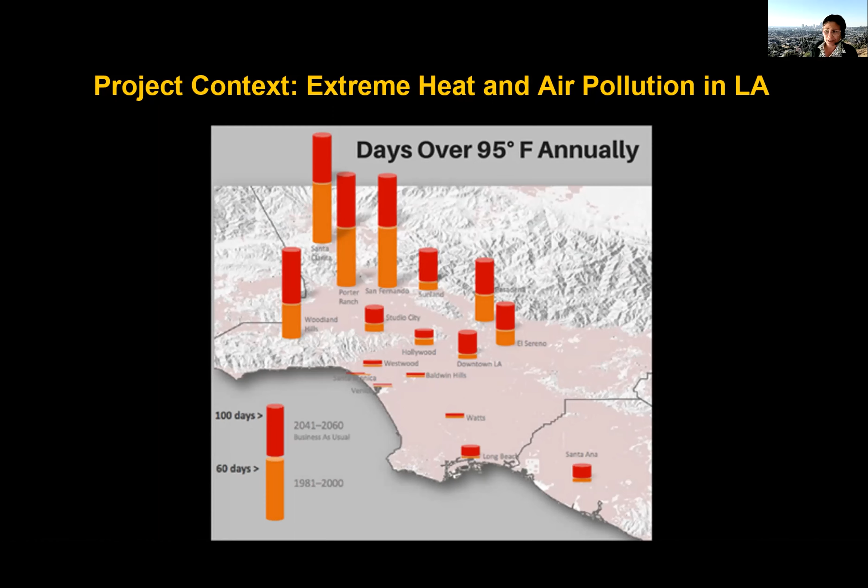Not every place in the basin is going to experience the level or the quantity. Everything's going to multiply, but some areas will still have less hot days than others. Some areas in the valley already have hot days, and they're just going to see more of that.

So we actually started this project out—one of the things I did was, I happened to be very fortunate, on September 15th of 2020 I took my laser thermometer out there and started measuring the temperature on the asphalt and the streets, on the sidewalks, on the grass, and under the shade of trees.

And I found extreme surface temperature differences. For instance, in Lincoln Park, a high of 140 degrees on the asphalt and a low temperature of 88 degrees under the shade of a single tree. That was really similar all over, with 30 to 40 degrees of difference between paved surfaces and shaded surfaces.

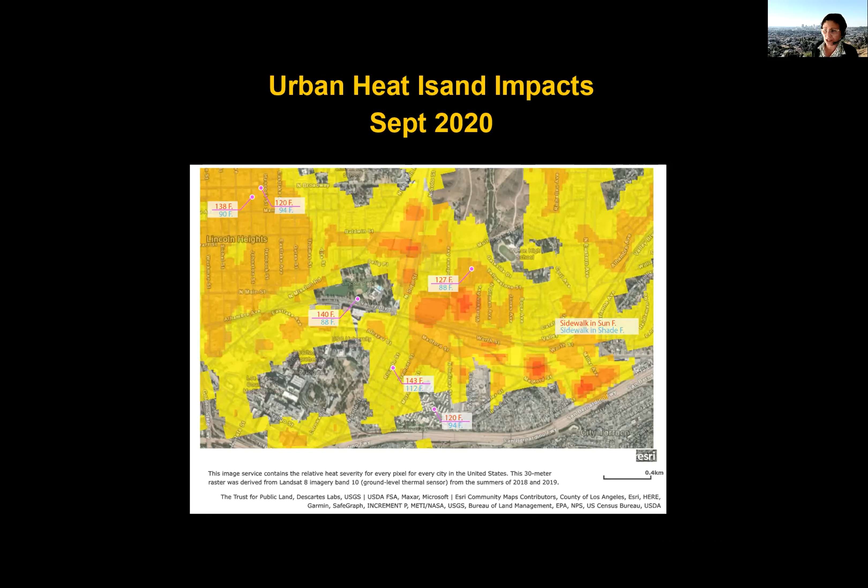So that was a good piece of information and has served us well throughout the study. One of the questions is, what kind of tree? What are the trees that are going to provide effective shading? How can we be more strategic?

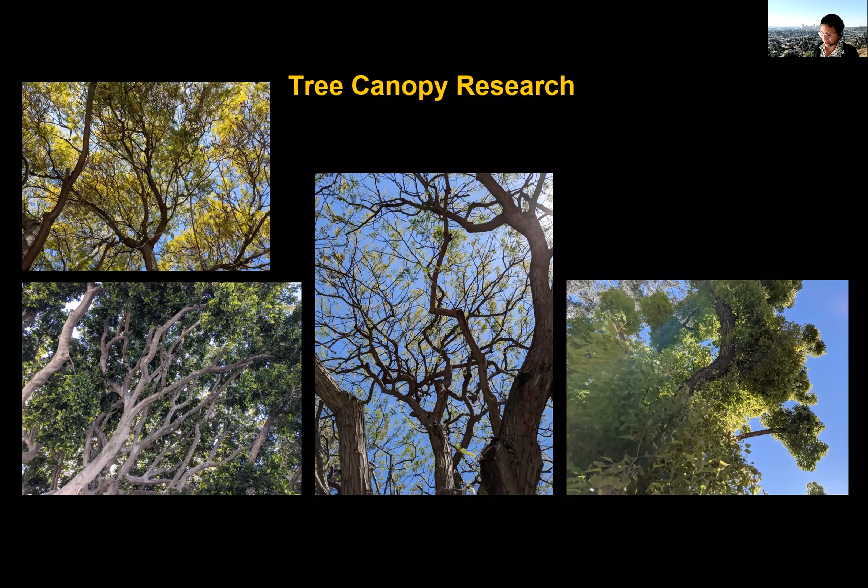But there isn't really a standard that says, for the trees on the list from the city of LA, which ones have the greatest leaf area density and the best potential for providing necessary shade. Then there's a whole host of other complications about what makes these trees appropriate or not: potential damage to sidewalks and other paving, resistance to disease and pests, and maintenance requirements. So a lot of things there.

So this is what we've really been trying to do: look at the urban forest around USC's HSC campus, and determine where, how many, and what types of new trees can be added for the most effectiveness in communities that really need this. And then there's an air quality side to this.

Professor Will Berelson has been developing air quality monitors, and this was new, interesting, and different. We actually climbed up into trees and put these sensors in the canopy to measure PM2.5 and carbon content. Here's our study area, around the health sciences campus.

It's kind of interesting—we have some very large areas of open space, which in my opinion tend to skew some of the tree counts. We did this because this is a community and equity process.

We looked at the data to better understand our neighborhoods, and met with community members about three times over the course of this project, to understand their understanding of trees, and importantly, what their response to extreme heat is going to be. What are they thinking? How are they planning for it?

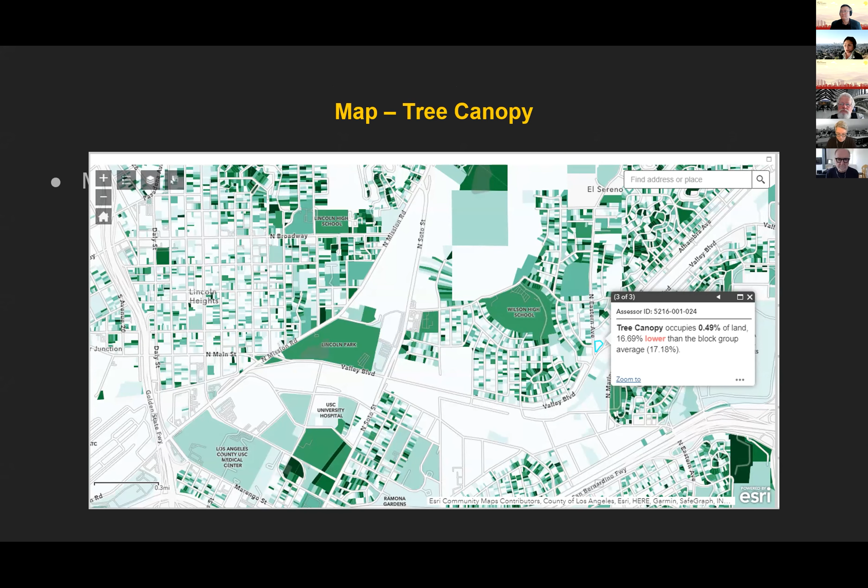Within their resources, we used all kinds of data, including tree research that's available to everybody, estimating tree canopy existing in the area now. As you can see, it's lower than average. And we identified these research gaps: which trees, how many, where, and what will the outcomes be.

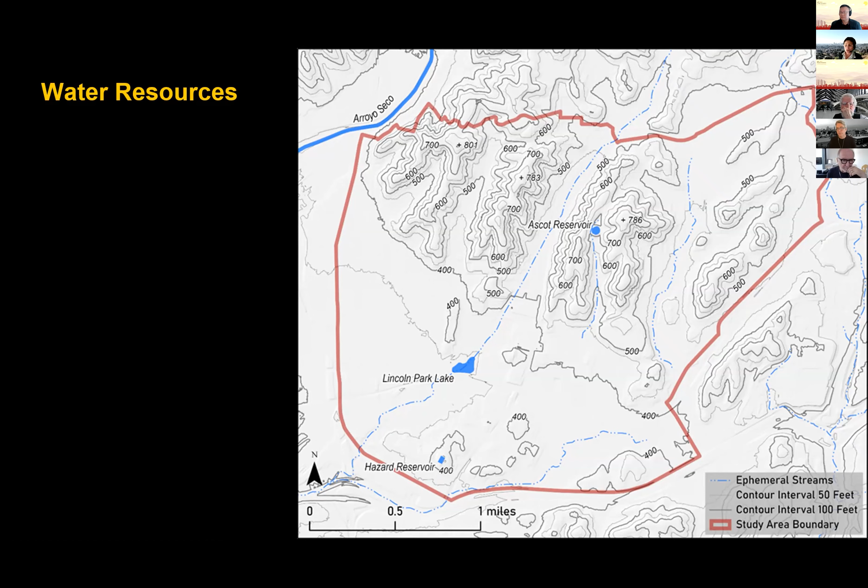An important thing to think about is that more trees need water. This is actually something we need to follow up on and haven't gone forward with, but thinking about where the natural water flows are, where the soils are likely to be most moist from underground streams, ephemeral streams, and historic hydrology—those would be the places where trees need the least supplemental water.

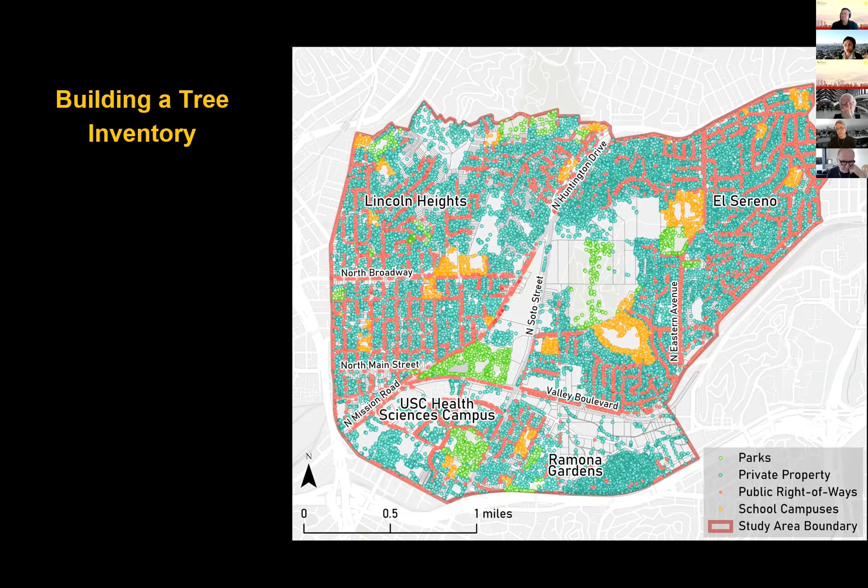So I told you the students did a lot of work here. These four students inventoried 38,000 trees, one by one, counting them from aerial photography and other data. Now the other hard part was they tried to identify all of them.

The city of LA has been working on a tree inventory, so some of the data was already inventoried, but they've been adding thousands of trees. And when the students couldn't figure out which tree it was, if it wasn't one of the low-hanging fruit easy ones, they called me and asked, what are these trees?

We did this during COVID using Google Street View. Actually, the time view feature was very helpful to look at these trees at different seasons, if they'd been there long enough to see their flowering characteristics or any other seasonal differences. We got almost all of them.

The land use, to summarize: there are parks, schools, and a lot of multifamily, higher density housing here. There's very low permeability outside of these large green areas, which are the Health Sciences Campus, Hazard Park, Ascot Hills Park, and undeveloped portions.

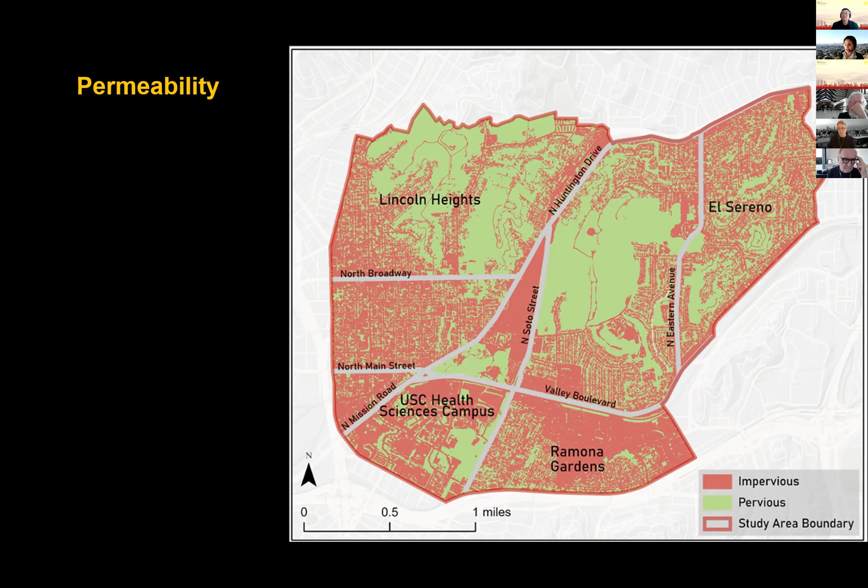Everything that is urban has extremely low permeability. This was very important as we looked at street trees, identifying which streets have wide parkways versus narrow streets and wide streets. The wider streets tend to have wider parkways, which you'll see why that's important.

We also looked at schools and parks as potential tree planting locations in the study area. Then the students and the spatial sciences folks crunched all this data, the demographic and physical data, to better identify where the most urgent needs are, where tree canopy is lowest, or where the most vulnerable populations are.

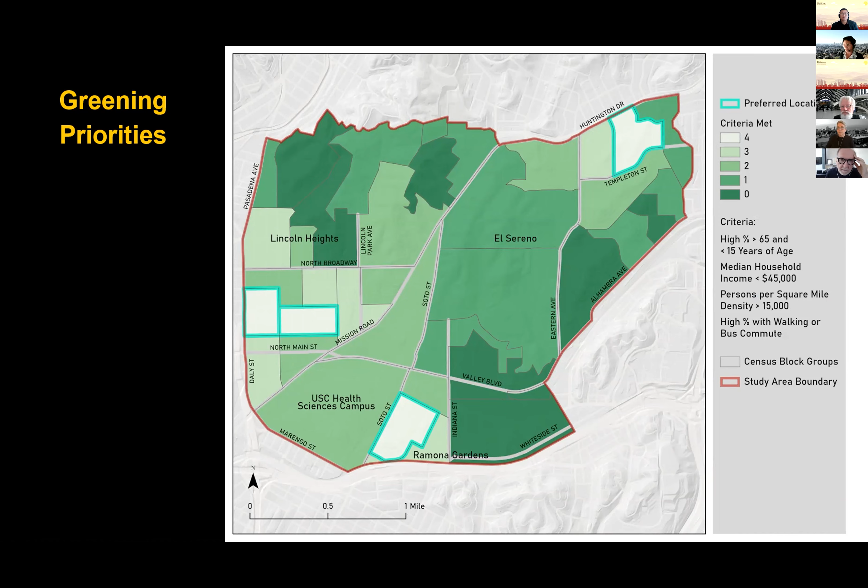Over 65, low income, dense, with a high percentage of walking or bus commute, meaning households that don't own cars. That is where we figure people actually need good shade for their commuting, for their household errands. And it also corresponds, I think, with income. A lot of these neighborhoods, also the houses, there's not a lot of air conditioning visible. And I'll show you that.

So we developed these 5 greening scenarios to try to gain some understanding of what's there and what improvements we could make and how those might be made. So we started on a street. This is a street called Axtell Street in El Sereno, which we consider low-hanging fruit. These are 6-foot wide parkways already on these streets. The challenge here for the city, as they understand it, is they need to find money to actually remove concrete and plant trees. So we're looking at this one.

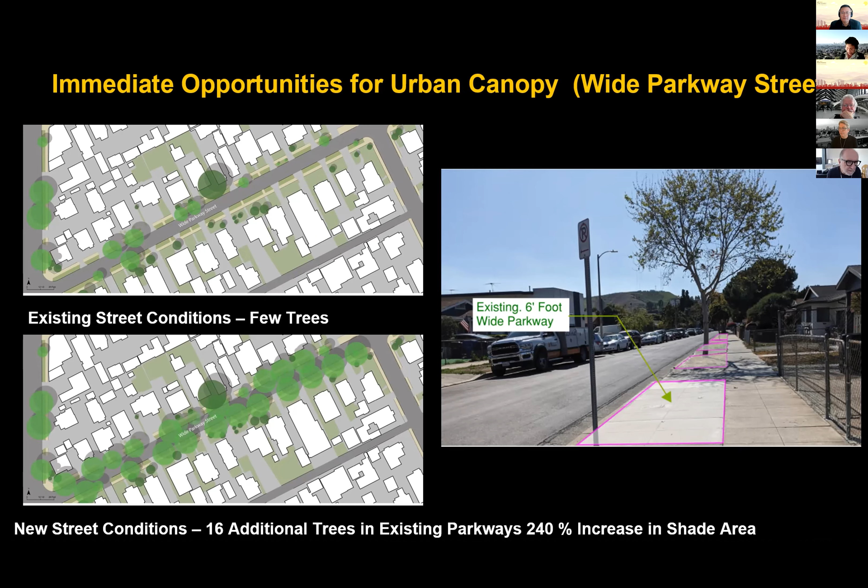In this one, there are a few trees actually on the street. It's mostly an issue of planting in existing parkways. We're looking at doubling the existing shade canopy and lowering surface temperatures. And you can see there's also a lot of space on private property that could have increased tree canopy here.

All right, not so easy. This is the hard one. This is a street called Barbie Street. It's actually not very far from North Broadway and from Lincoln Park. This is a narrow street with a 3-foot wide parkway. If you look at the little trees over on the bottom right, that is what you are allowed to plant in there by the city standard now. There is one existing street tree in this 2-block stretch. There's a lot of on-street parking.

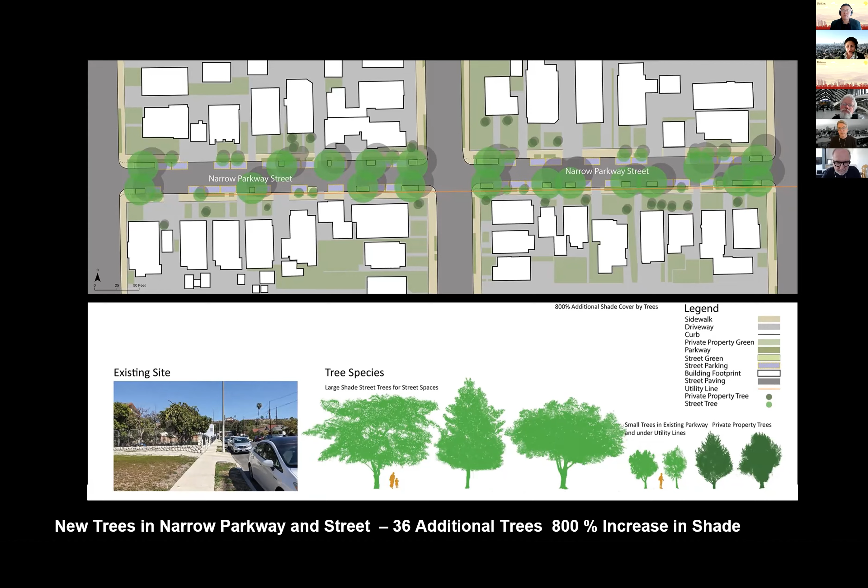So the rule we set was, there's a utility on one side, so we will plant small trees there. Some people would really like to have citrus trees and other small trees or flowering trees, so go ahead, plant them in the narrow parkway. But in order to really achieve significant shade, we need space for large trees. We need 100 square feet of root area. So the proposal we developed was to actually take space in the street right-of-way and create large volume root areas for large shade trees. But this is new, different, and innovative, and nothing the city has tried before.

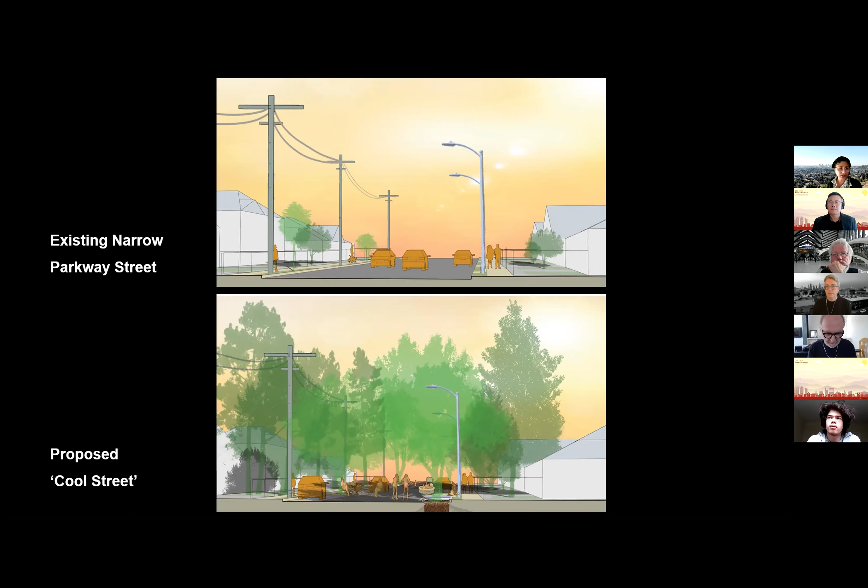And then once you do that, if you think about things like the slow street programs we've got, this is a 2-block stretch. You could close it off when it's 95, 115 degrees, when the paving on other streets is 145, and the temperature inside the houses is 115. Have a block party in the 88-degree cool shaded street. This is a cooling resource, and it is a health resource because there are health impacts from extreme heat.

So we also looked at parks. We looked at Hazard Park, which is adjacent to the HSC campus. The rules here were we didn't take anything out that was already there. All the programming stays. The trees in this park, there have been trees, they're in varying states of health. Some are great, some are terrible.

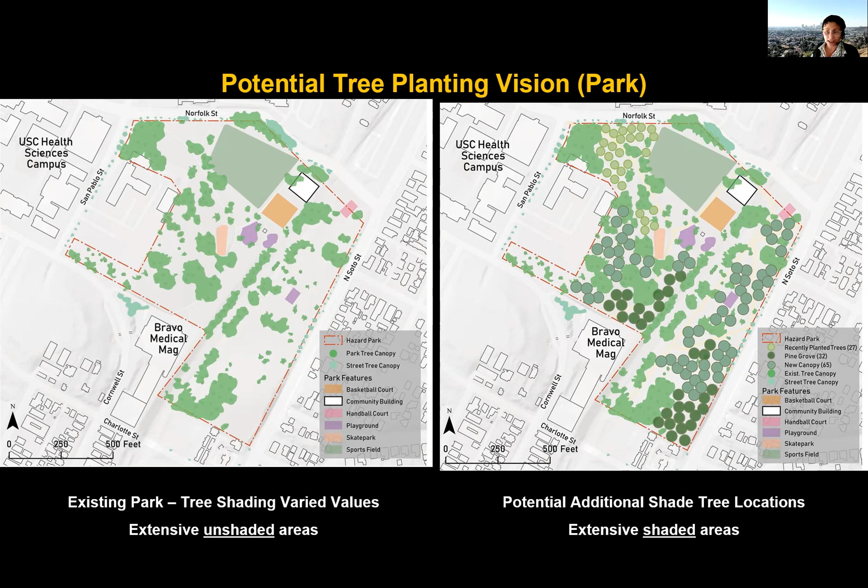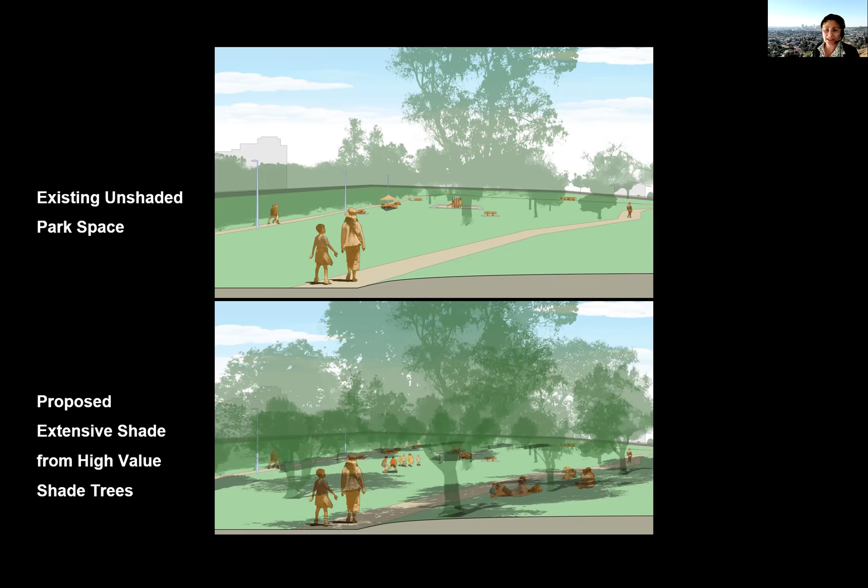The issue here was maybe not so much as the other partners in the study are focused on, how many trees, numbers. My focus here is effectiveness, efficiency. How much cooling can we provide? How can we take all kinds of existing unshaded open space and really maximize the shade there as a neighborhood cooling potential? And this is where the air quality comes in. How do we pick the appropriate species that will actually absorb PM 2.5, maybe PM 10, other carbon and other pollutants? And what we know is some species are much better than others at actually accumulating the pollution.

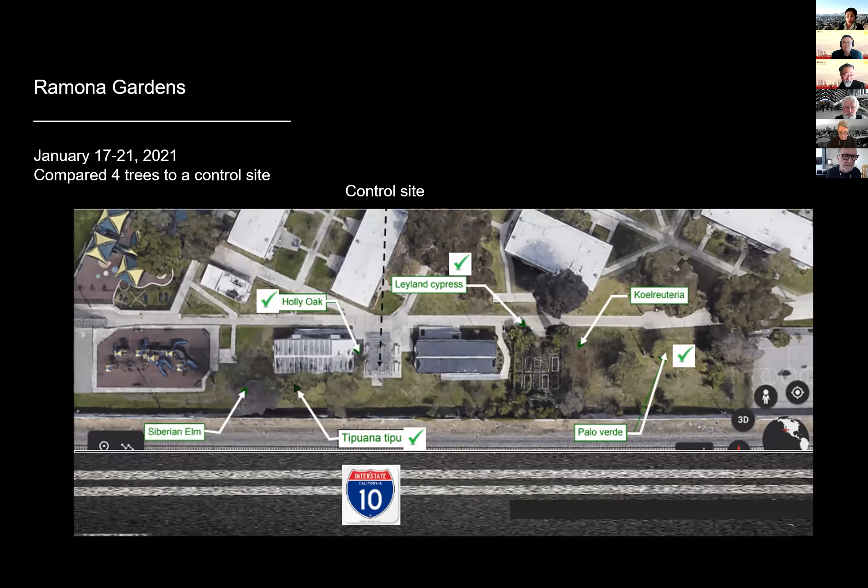And this is what Will Barrelson has been studying. So we started our study over at Ramona Gardens, which is in our study area. Will has been working with these air quality sensors. We identified a bunch of trees, and he put the sensors up in the trees to measure between a control point and what was happening in the trees. And he got some interesting results back.

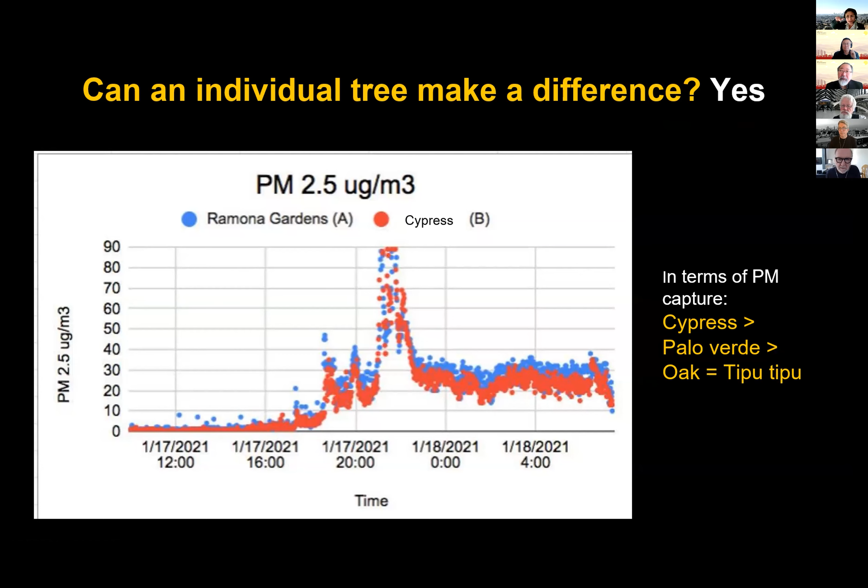There's not a lot of literature in Mediterranean arid climates. This is the problem. But I saw consistently in the research that pines and coniferous species are the best accumulators of PM2.5 and other air pollution. Part of the reason for that is they're sappy. And interestingly enough, when the wind blows, their leaves don't flatten and go parallel to the wind. Their leaves or needles stay perpendicular and capture and accumulate the PM2.5.

Good news is we're almost finished with our final report. We presented this to President Folt on Monday and Tuesday. It's been a long week. There will be a barrage of public announcements as part of the USC Earth Week celebration presentation. We're contemplating a next phase to get into more of the meat of the data. Thank you.

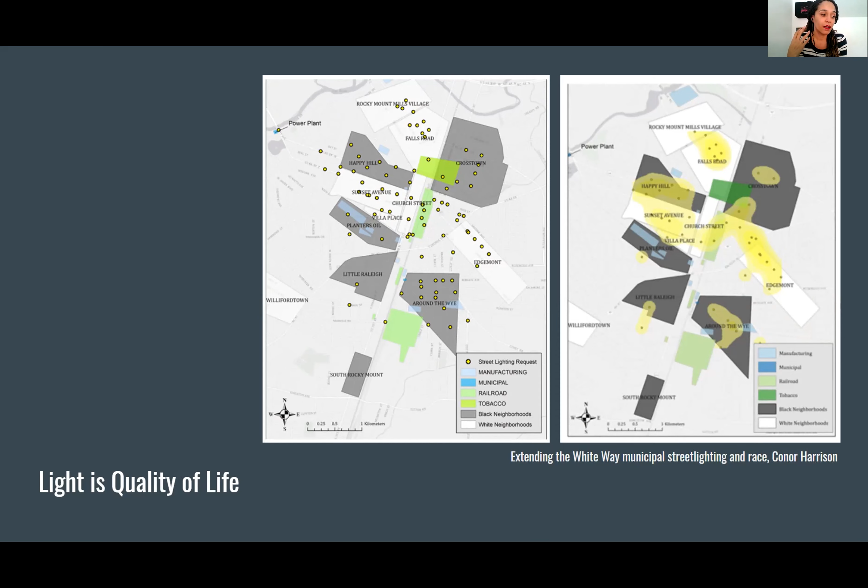When we started this process, we really thought going in that we would find, like the colonias, that neighborhoods of color were going to be underlit—there wasn't the infrastructural support, the tax dollars, or the interest. What we realized is that it's actually a bit of both: neighborhoods of color are both underlit and extremely overlit as well. There's more to talk about that a little later.

It would be almost too obvious not to talk about light at night as a means of safety. Again, like darkness and light, safety is more than just a physical, measurable item—it's also a loaded term. What makes a neighborhood safe and how safety measures are applied is unequal.

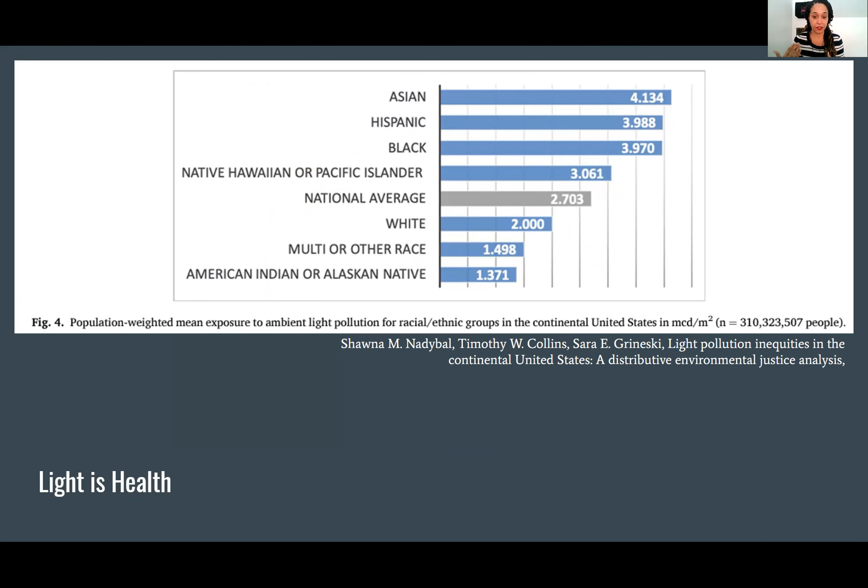But there's a correlation between being in a neighborhood that is being inundated with an extreme amount of ambient light pollution. Then you have the psychological stressors of being surveilled, and then you have the mental effects of not being seen as an individual. There is a very real correlation to how all of these effects can be greatly recognized in your community.

And that can happen either because you live next to one of these floodlight poles that's blasting light into your house and you can't get rid of it. One of the residents said that they felt like they were in a strip mall on the moon because the light was so intense coming into their house. And it could also be from shift work.

So when we look at the quality that we're trying to achieve for people, it's really somewhere in the middle. It can't be underlit and we can't overlight. And so the right quality of light that we're trying to hit is one that is really contextual.

And so what we're trying to move to now is really looking at taking all of the different kinds of studies I've referenced and applying them to Los Angeles. So we're looking at, in summary, different demographics, income, race, redlining effects and how people have been pushed into certain areas. And then looking at the density of streetlights in these areas, just to give you an idea of how many of the 220,000 streetlights there are just in LA City, filtering it through the code recommendations or requirements through these organizations, and then really seizing the moment because LA is preparing for the 2028 Olympics and is already starting to make infrastructural changes to support that.

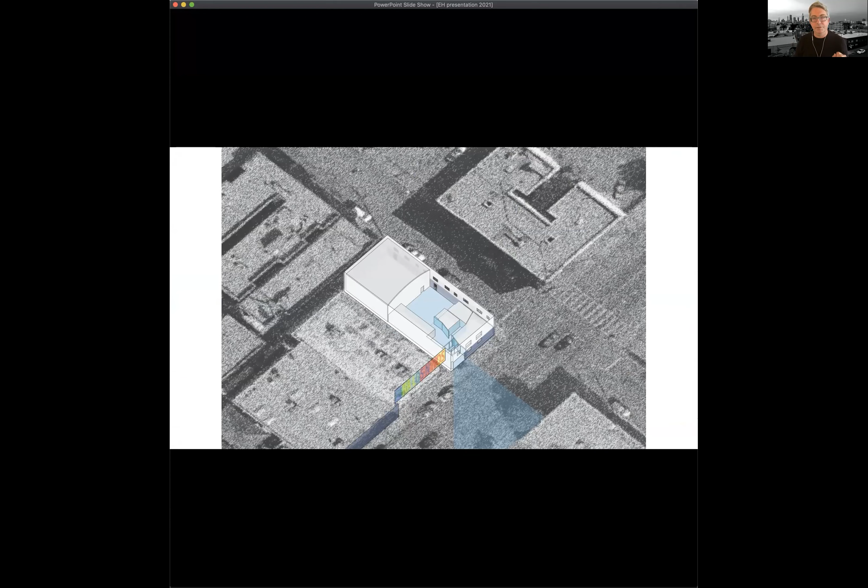So our first project for them was called the Family Center, on the east end of the block, which was basically a small renovation of a bowstring truss facility. This is a diagram we had at the time about the idea of broadcasting a beacon to the community out of this relatively small 2,500 square foot facility. Our work was really restricted to this area, if you can follow my cursor, of the existing facility.

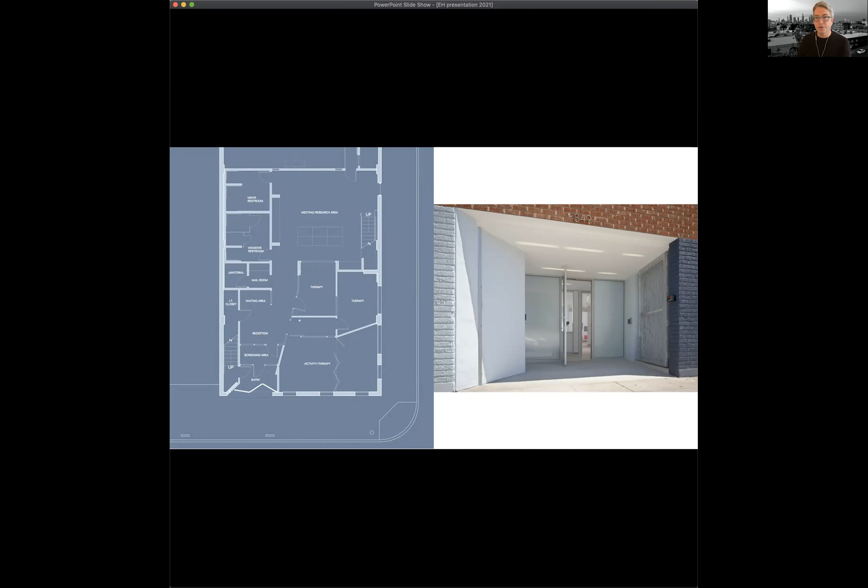One of the major concerns of a place like this is not only the relationship to the relatively rough streets outside, but also to internal family relations that might have provoked some disagreement. So one of the major concerns was about access control moving through this space. There's almost like an airlock at the beginning of this sequence into this facility to allow very restricted control over who gains access to the interior. The goal was to make a space of protection, nurturing and privacy where families could come and feel secure in their dealings with the therapeutic consultants and counselors.

So this is a kind of diptych we set up to show the distinction between the space on the street, which sadly has gotten even more heartbreaking over the years since these photographs were taken. We're right down the street from Gladys Park. Some of you will know that as a very tough area to be near today, and creating this space—there's a completely different world inside this facility.

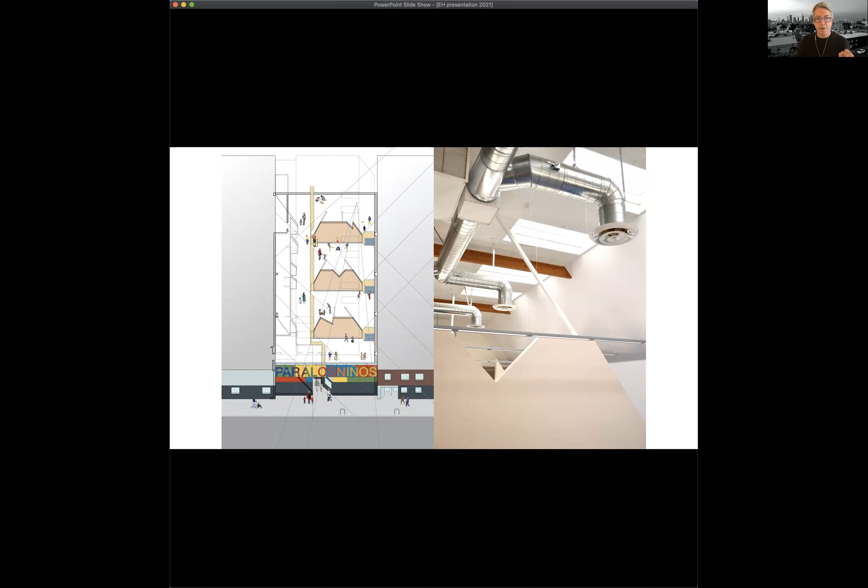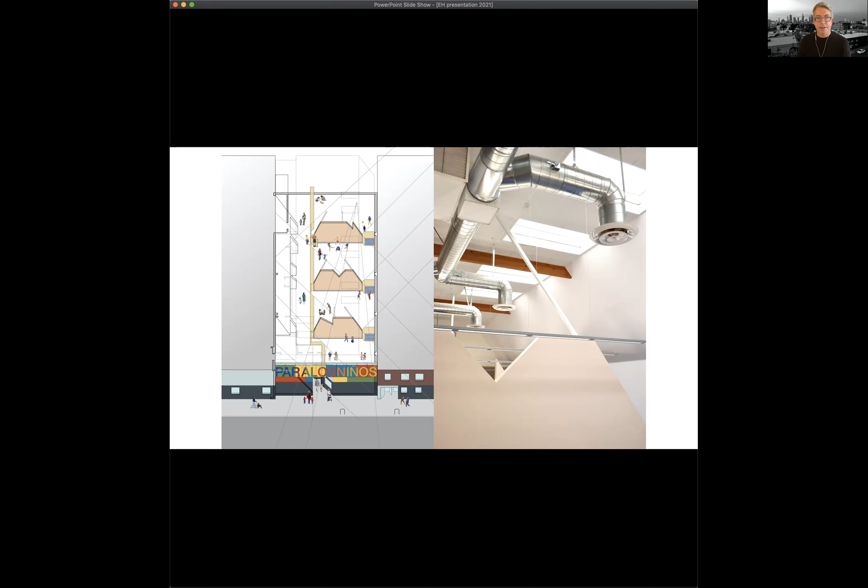We always felt that the research is growing about the specific benefits of things like light, view, and acoustics on not just kids in higher levels of education, but even very small children. So the project was about inserting three freestanding walls into this larger space to serve both the isolation or independence of each individual classroom, but also encourage connectivity among the various caregivers that work together in this space.

A view down the side where you can see the existing skylights. There's a large plane that we inserted here to bounce that light a little further into the space. And then down one side, these shaped walls stop and allow a space for the caregivers to lean over into each other's space when they need to chat or check in on somebody or observe what's going on.

So individual independence and some acoustic privacy is maintained between the individual classrooms while contributing to the overall connectivity of the facility. This is a larger view of the overall space with these three walls that have an abstracted crenellation to the top of them, hopefully encouraging the kids to be able to look at shape and form with renewed imaginations.

And the last bit of our work for Para Los Niños on this site was a large signage element to allow a renewed sign of commitment to the neighborhood—this organization had at this point been there for 35 years. So we were riffing on the primary colors of the organization and figuring out ways we could get past primary colors.

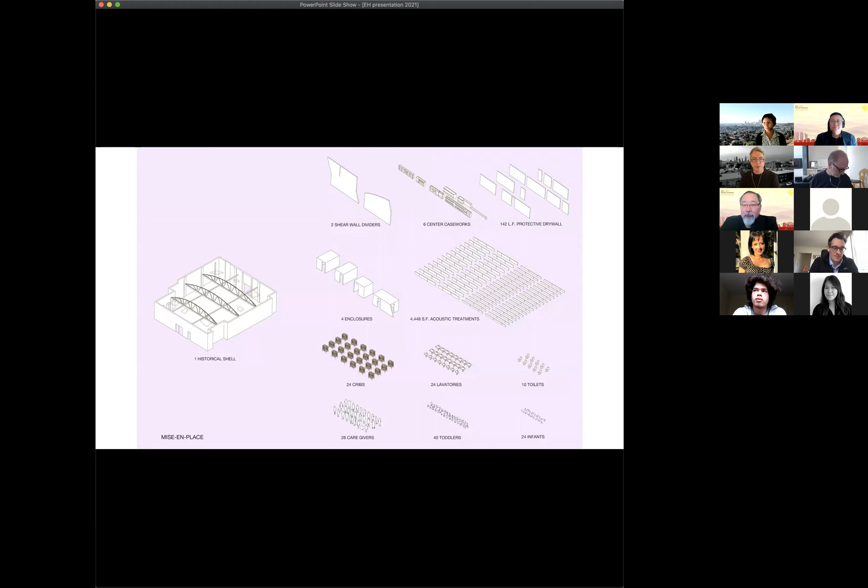So we had what we called the mise en place drawing about all the things we needed to put in the shell. If anybody has done work involving small children, you know there is a lot of plumbing involved - a lot of toilets, a lot of lavatories necessary to pass not really building code, but state licensing requirements for these small children. A ton of the budget was spent on plumbing, as well as structural upgrades.

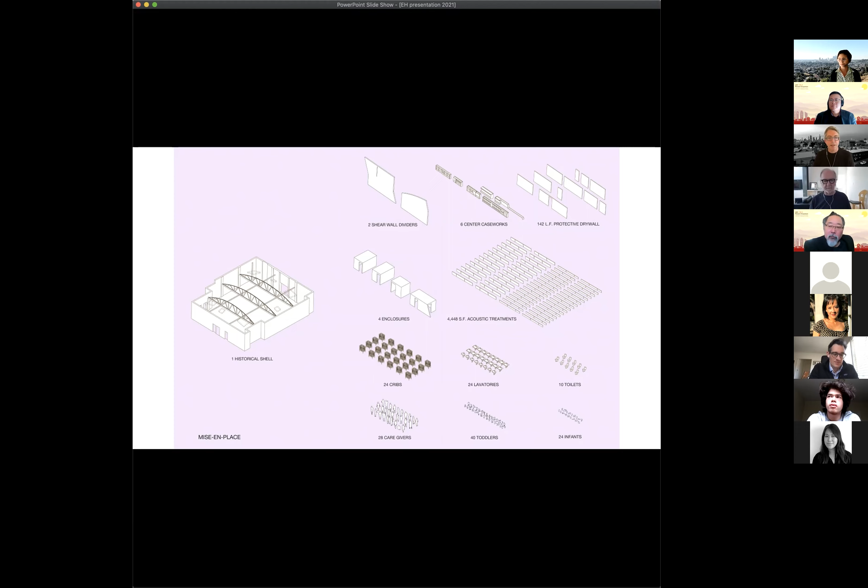It's an unreinforced masonry building. It gets a little crazy to put kids there, but we went through and reinforced the system, not only with additional shear walls, which you've seen in the images, but also layers of protection around the perimeter, isolating the masonry from any future problems.

This is a floor plan. We had an idea about creating essentially an internal street within this relatively dense site, organizing these rooms as large facilities. These are driven by state licensing requirements - large facilities for infants, then toddler classrooms here and here and here and here, as well as administrative spaces on the other side. This drove the building officials crazy because they wanted to maintain this as a corridor, not a hallway, but we got past that.

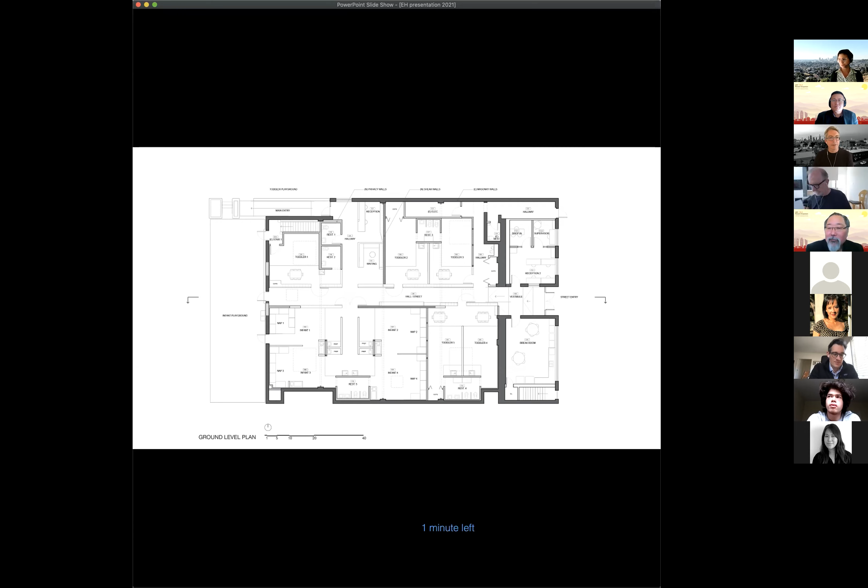One last note - this facility did become a place for the community. That was always the intent, our secondary goal, about opening up the interiors of these facilities so they can serve not just as individual classrooms, but really as a community center.

The goal, of course, is to provide wraparound services to the parents of young children, not just daycare. So it becomes a place for nutrition.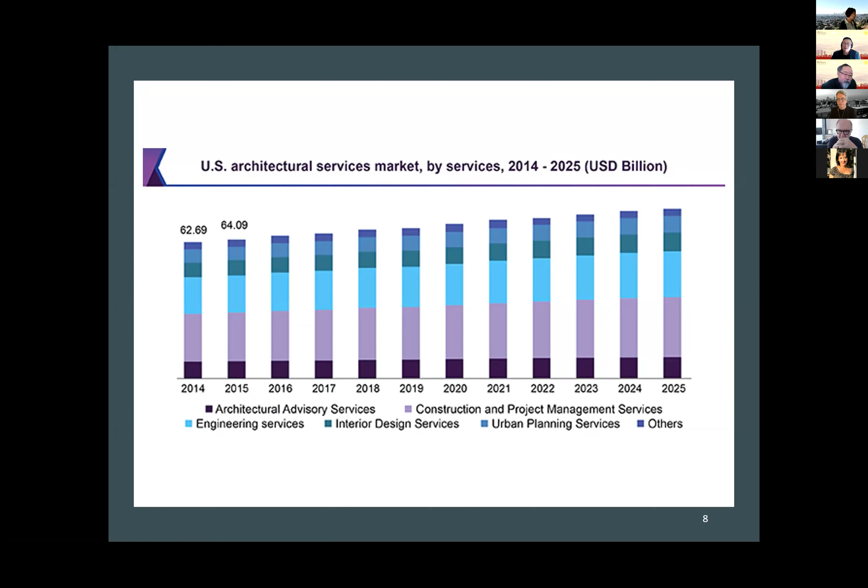So the one funny thing is that I frequently go to some wearable computing conferences. It isn't completely my domain, but I go - I must go every year, except during the COVID season.

So this one is a kind of amazing project, science fiction-like, as in The Matrix. In that movie, Keanu Reeves learns new skills from a computer passively. That's kind of what we're talking about here.

But instead of plugging into a computer, Thad wants you to wear these gloves. Meet Thad's colleague, Caitlin. People say Thad is quirky, but I never really picked up on that, so I guess I must be quirky too. They started with piano - the first thing we tried was conveying a simple melody on the piano using a wearable computing device in the form of a glove.

Yeah, so the principle is that they provide an electrode signal to the hand, your muscle will train, and then once you move your hand on the piano, your hand can play automatically. Okay, so actually I have seen this one as a prototype model when I attended the body computing conference a few years ago.

And at the time, another team, not her team, but another team, they brought a magic glove. It's a very similar principle - even though you have no idea how to play guitar, you can play guitar with this glove because it generates a lot of electric signal. Amazing. That is AI.

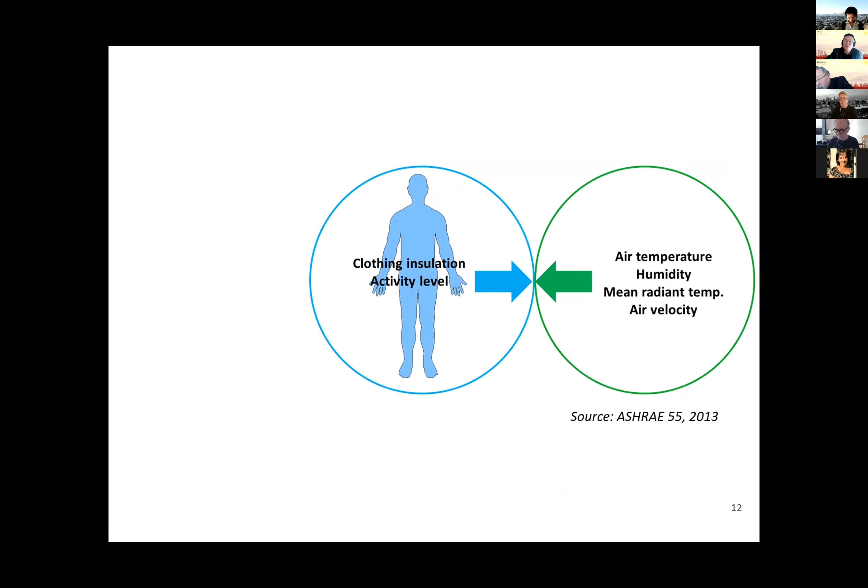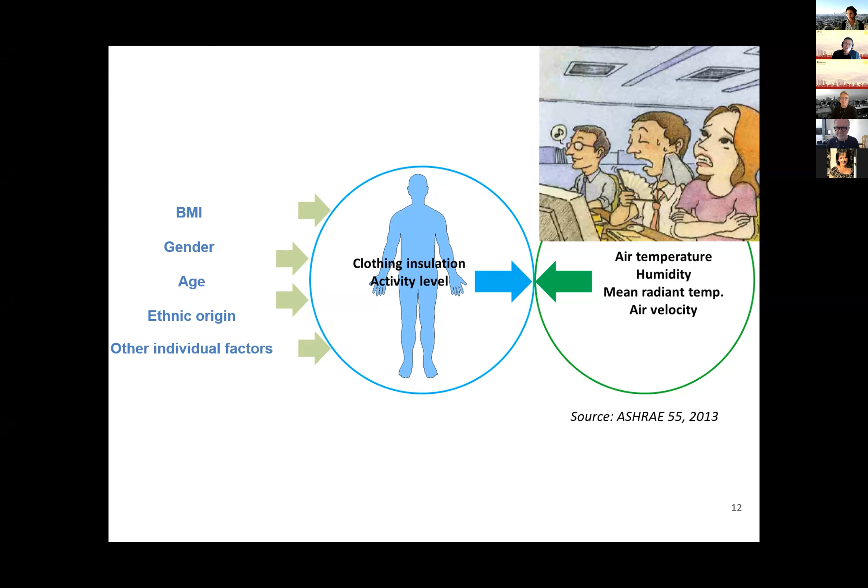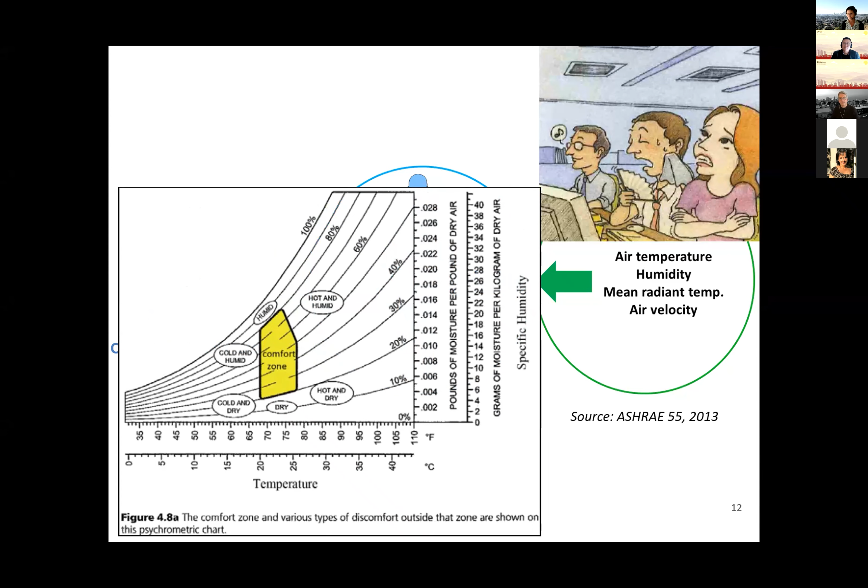So this is conventional research parameters to estimate your thermal comfort: clothing insulation, activity, air temperature, humidity, mean radiant temperature, and air velocity. In our domain, we use these to predict thermal comfort - how cold or how warm you are. But the thing is, in reality there are many hidden factors. The conventional guideline says 75, 77, or 70 Fahrenheit should be fine for everybody, but it's not true.

So previously we used to have a mannequin. This lady's name is Jessica. She is not just a plastic mannequin - she has some blood vessels inside and her skin temperature is slightly warm, she has a heartbeat or something like that. So it's a very good experimental toy that we frequently use in the building science domain to study thermal comfort. So let me share this one.

Oh, hey, hi, Stacey. How's it going? Really? It's 83 degrees outside. Right, and look at me. I know, yeah, but it's been just so crazy, slammed. Todd, you've got to do something about this office, you could bake a chicken in there. Right, I'm gonna take care of it for you, okay? Good man. You bet.

Okay, anyone else? Yeah, so that kind of situation always happens because individually we have different preferences in terms of thermal comfort in our domain - some people are not much happy while others are happy. So that is very common.

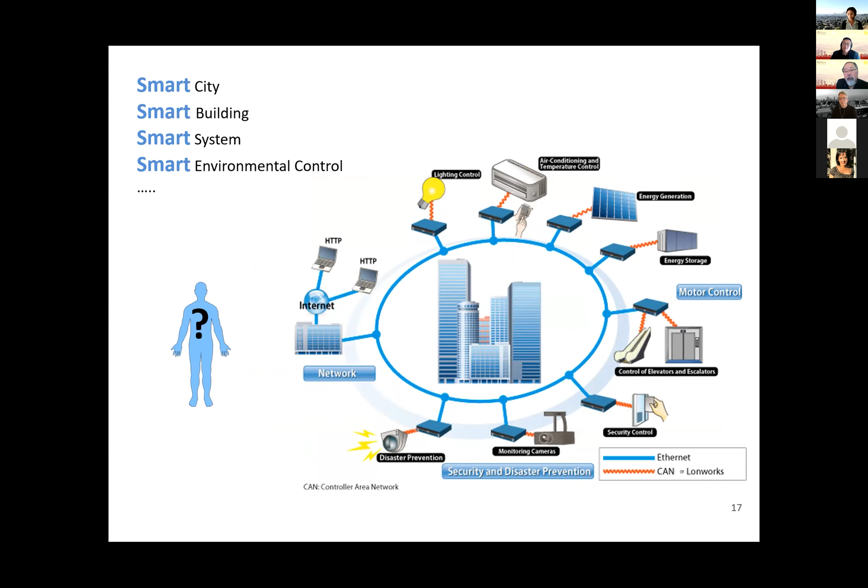So these days we are doing a lot of smart city things, smart building, smart system, smart environment control. The thing is that we have a lot of advanced technology now. So we started wearing a lot of wearable sensors - it could be wearable on your face, wrist, chest, arm, or leg. There are many options available.

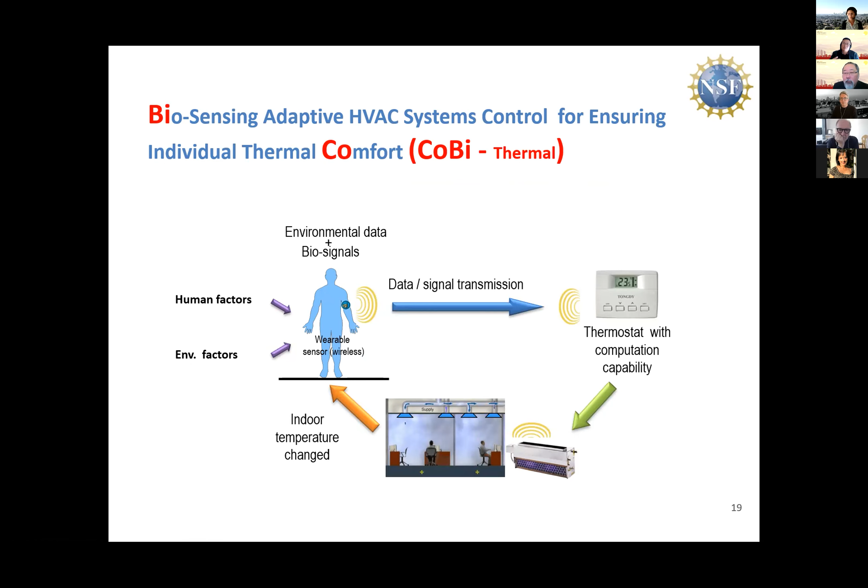On the other hand, 82% of people in the US say, hey, I'm willing to wear whatever, as far as it's good for me. So as compared to some thermostatic control, with the help of AI I developed, with the support of NSF, skin temperature driven environmental control. This means that without asking you to operate your thermostat or app, it just estimates your thermal comfort based on your wearable sensor on your skin. So this is the interface, and I also incorporate facial skin temperature.

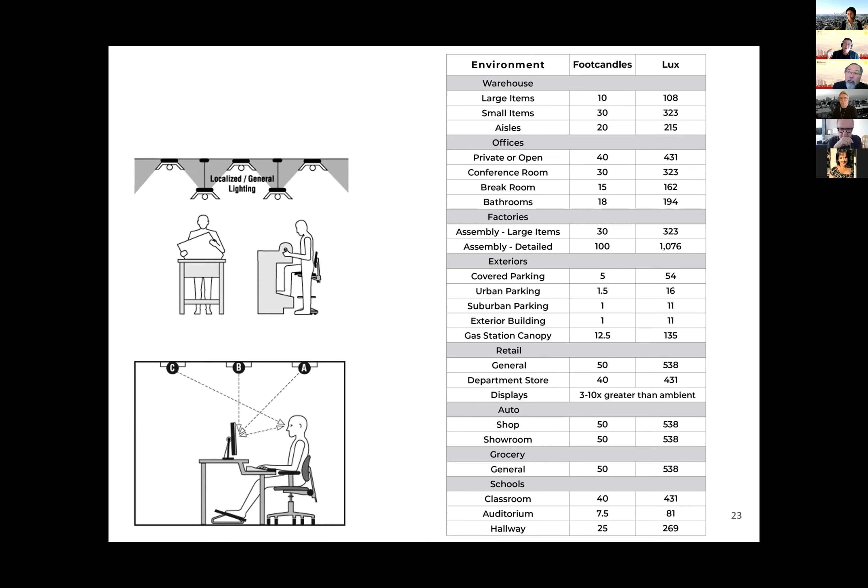And for lighting, we have a standard guideline - hey, in an office it should be lux-wise 400, 500. Some living room maybe 200, aisle area 200 or less, something like that, very strict. But it's not true, because depending on people, we need a different light level for their personal visual acuity or background, some preference, cultural background, cultural preferences.

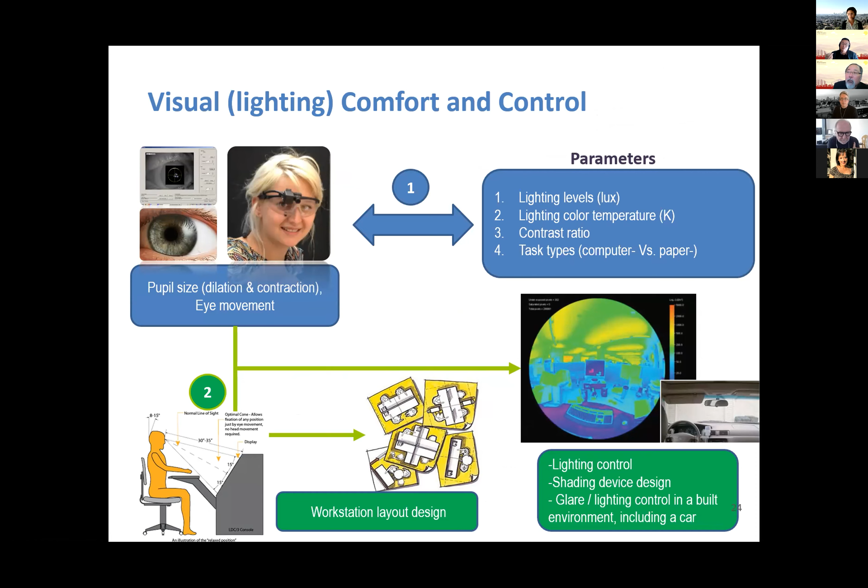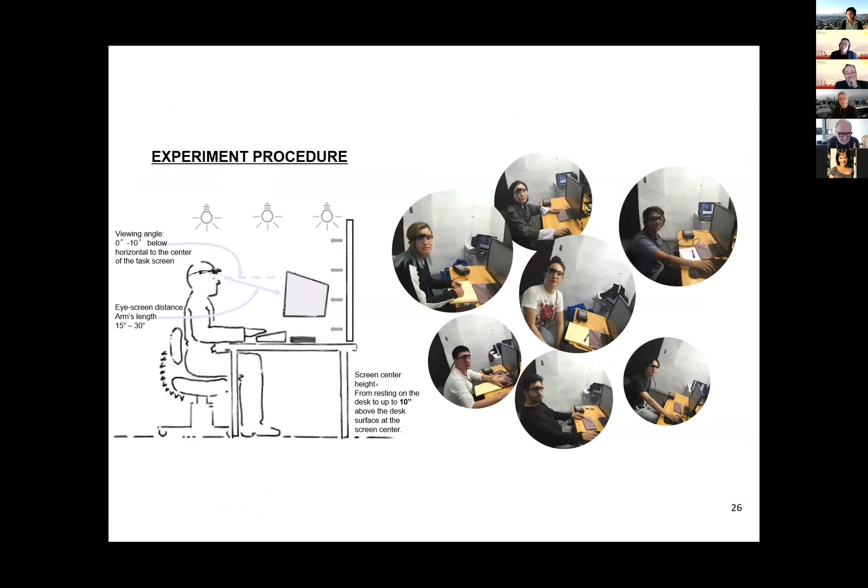So we try to accommodate eye pupil sizes to estimate the visual sensations, to estimate his or the user's bright visual comfort. We use a lot of formulas and collect eye pupil sizes to integrate. Then we did a lot of human subject experiments, which means a lot of data. So we actually developed eye pupil size driven environmental control for lighting conditions. Yeah, in the right column, bottom right - so this one is just a concept, but this one is a prototype.

While we are collecting data, we estimate the user's visual preferences and then mimic his or her preferred lighting level using AI. So this one over here, I intentionally turn off the light, and it's supposed to be brighter. Because this is 100% controlled based on the human eyes, if I turn it on at maximum, it should be reduced to adjust. So that is one prototype model to meet individual needs.

On the other hand, machine learning, neural networks, and AI algorithms—our group tries to develop, based on digital twin technology originally from computer science, AI-based building facade design. We know this is really early stage work, so we still have a lot of things to figure out, but I believe it's possible to be implemented in the future.